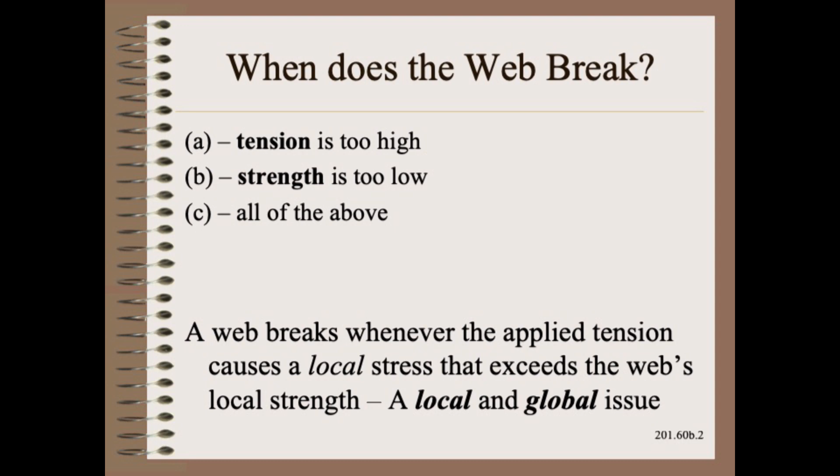Let us begin by answering a question. When does the web break? Does it break when the tension is too high? Does it break when the strength is too low? The answer is yes and yes. Specifically, the web breaks whenever the applied tension causes a localized stress that exceeds the web's local strength. Thus, it is a local issue.

Yet, it is also a very global issue. By this, I mean that the applied tension belongs to the mechanicals and controls of the web machine, and the strength belongs to the web itself. It is not machine or material. It is machine and material. So now let's move on to some important machine and material details before we put the two together.

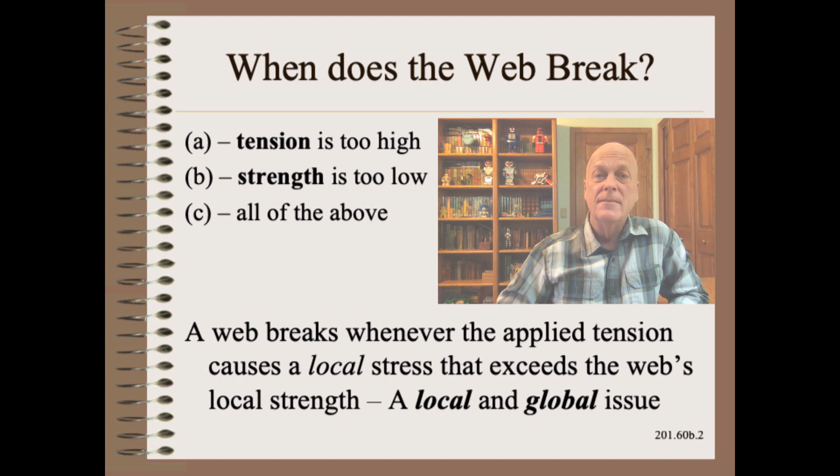Local stresses are far from uniform. They will be higher on the tight lanes of the web. They will be higher on the outside of the bend in spans where rollers have out-of-plane misalignment. They will be momentarily high when an out-of-round roll rotates. They will be higher during momentary tension drive upsets, such as seen during speed changes, and so on.

My paper, Combined Stresses, shows how to calculate and rank the individual contributions of the most common factors to a reduction of overall safety factor. Thus, you would know which factor is largest and perhaps most deserving of attention.

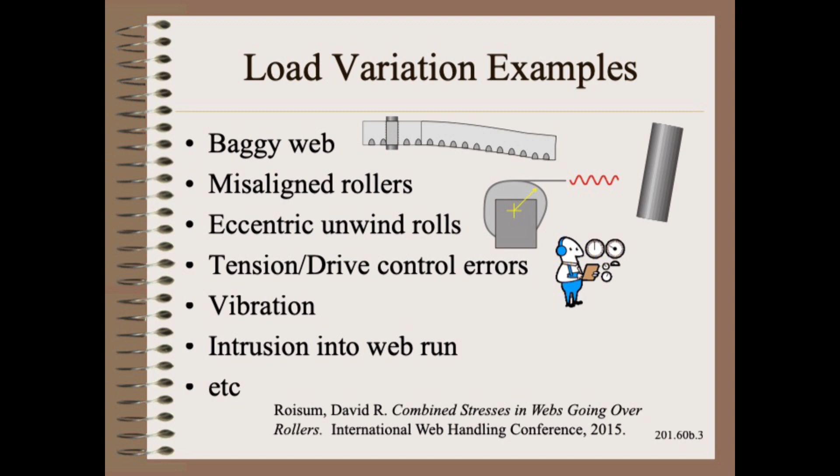Similarly, the strength is not at all constant across the width or down the length of the material. Unfortunately, the resulting local strength variations are exceedingly difficult to model or measure. Yet modeling has been done successfully a few times, but it relies on statistical representation of measured local weight variations, as one example.

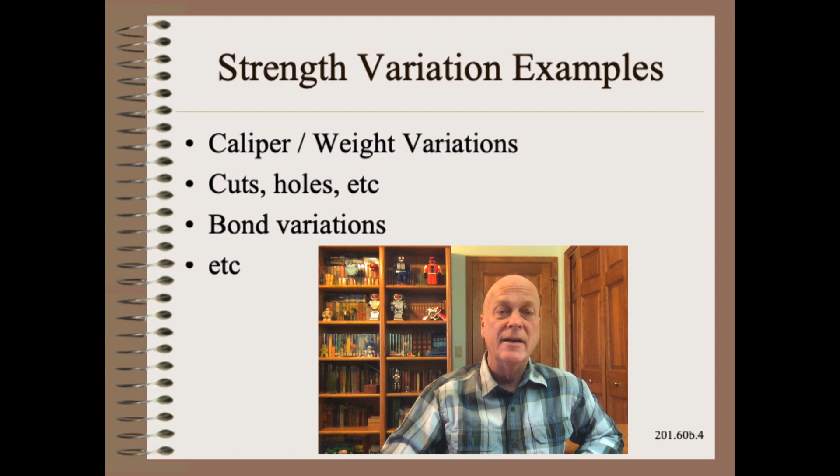So, let's put these two ideas of load variation and strength variation together. The specific example shown below is the most common and most commonly studied web material, newspaper. However, this principle will hold for most web breaks and, indeed, many rare defects of any kind.

The top plot is the strength of a 1 meter wide web as a function of machine direction position. There are several ways to get a plot like this, all of them difficult and all subject to assumptions. Nonetheless, it gives us a quite plausible result of an average strength of 10 pli in American units, or 1.7 kilonewtons per meter in metric units. The 1 sigma variation of strength is also quite plausible, about 1 pli.

The bottom plot shows the applied load on the same or similar section of material. This is measured quite easily with responsive load cells. Here, again, we see a plausible 2 pli average, though the variation is considerably higher than most modern winders would see. Recall that my widely published guidelines for tension quality are 10%, and here we have something more like 50%.

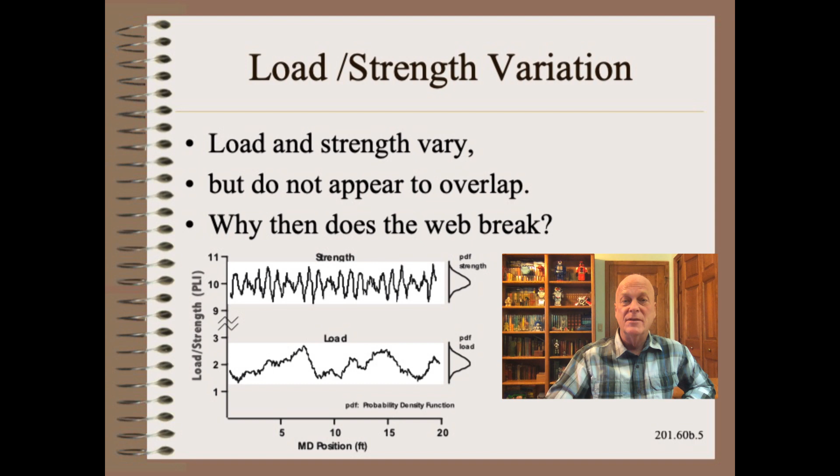Yes, there is. There is a very strong statistical factor. It has to do with sample size. If you look at the previous plot in detail, you will notice that we only showed a few meters of web length. There are 10,000 times that much length in a single wound roll of newspaper, and 1,000,000 times that much in 100 rolls. That is the basis the paper industry uses to report runnability figures.

As we look at more and more material, we will find ever higher peak loads. As we look at more and more material, we will find ever weaker sections of the web. This statistical behavior goes by many names, such as extreme value or Gumbel distribution. However, my favorite is the weakest link analogy.

It matters not what the average strength of the links in the chain are. All that matters is the strength of the weakest link. As we look at more and more chain, we will find ever more weakest links. The same principle applies to loads as well. Thus, we should be super careful about using any lab test measurements using super tiny bits of material to predict what acres of material will perform like.

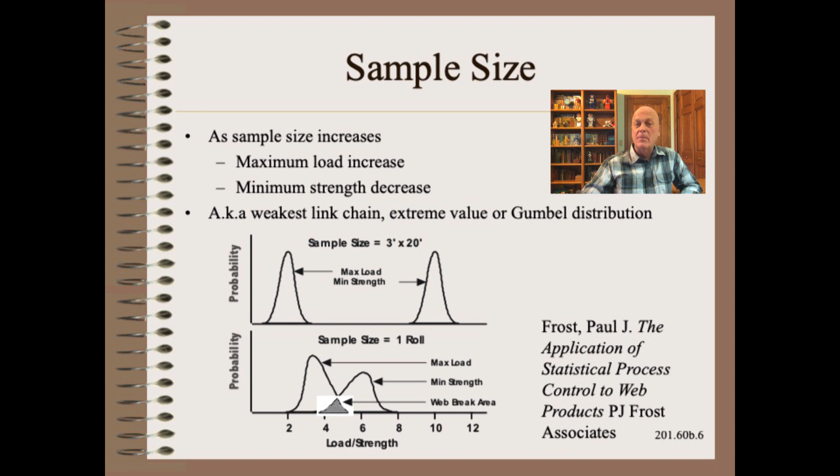Frost wrote a whole book on the subject of what you can conclude from tiny samples taken from a wound roll. This should be read by anyone in charge of rejectable specs, lab testing, and customer support. Strength, by any measure, does not imply runnability. Here is an example of a very strong web that had poor runnability, simply because it was variable.

I once worked on a Canadian newsprint winder where the web was in the 99th percentile for strength, and the mill manager refused to accept that part of the problem was his. That is, until I showed him that his variability was also in the 99th percentile. Very strong, yes, but very variable.

Variability dominated the system. So now we have inadequate sample size issues compounded by variability that is seldom measured that makes prediction problematic. We will soon add another problem to that list. That is, which measure of strength will you use? There are several to choose from.

Another concept we can illustrate by looking at load strength distributions is the idea of proof loading. Here we can run a higher tension on an upstream process, such as a mill rewinder, to cull or edit out or splice at least some of the weaker material so that it doesn't reach the customer, say a printing press, for example. If that process were perfect, a 3 pli rewinder tension setting would completely protect a customer running 2 pli. However, since both processes are far from perfect, it only reduces instead of eliminates downstream breaks.

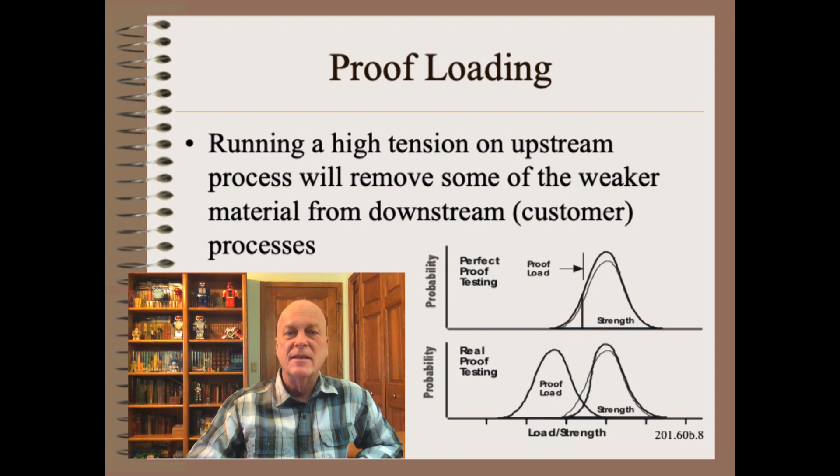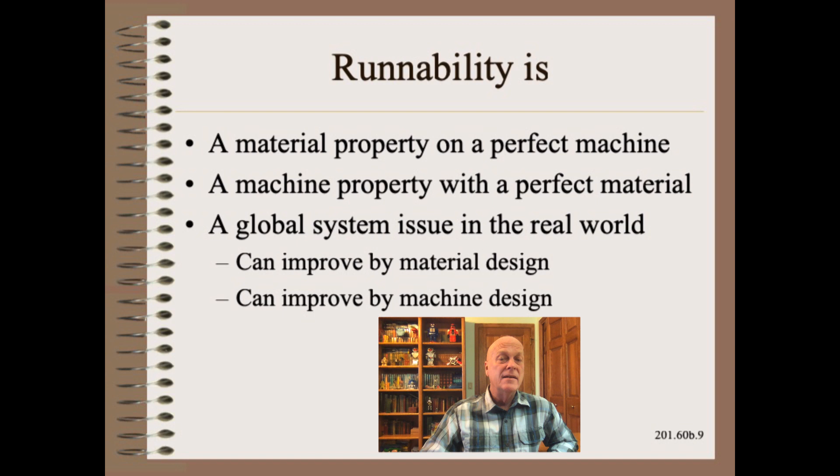So, in summary, runnability is a system issue where machine and material factors can be very difficult to separate. At best, we might define it as a material property on a perfect machine, or a machine property when running a perfect material, if there were even such things. The point is that we can improve runnability by both material and machine design, though individual cases may make one arena more physically powerful and another arena more politically palatable.

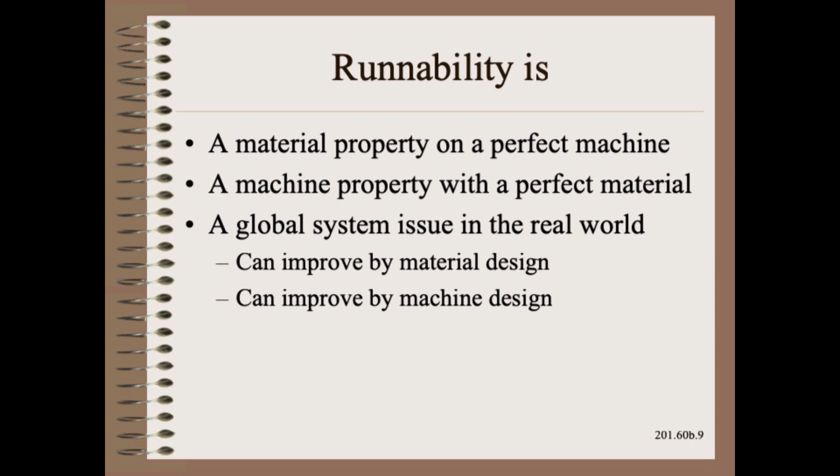Thank you so very much for allowing me to share some troubleshooting techniques for a rare event such as web breaks. Stay tuned for the next clip where we will show how to predict runnability.